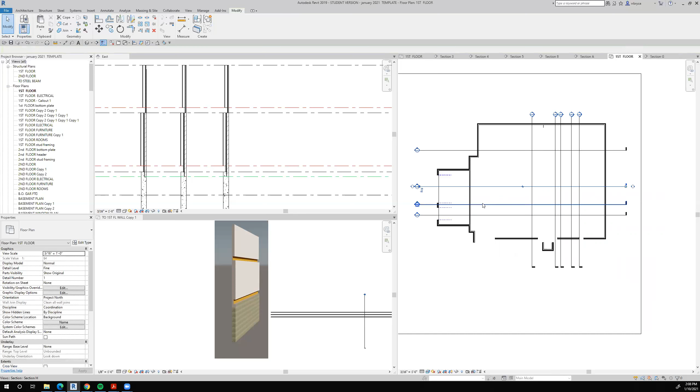So let's take a look at one of the sections through that stacked wall. Interesting. Okay, let's see what's going on here. Here we go. Here's what we're looking for right here. The stacked wall. Now, I'm assuming that there's going to be a second floor wall up here, and so I'm going to make my stacked wall accordingly. But if it turns out that there isn't a second floor right over at this point, then I wouldn't have a stacked wall that has a second floor wall on it. I'd simply make another wall that deletes that second floor wall.

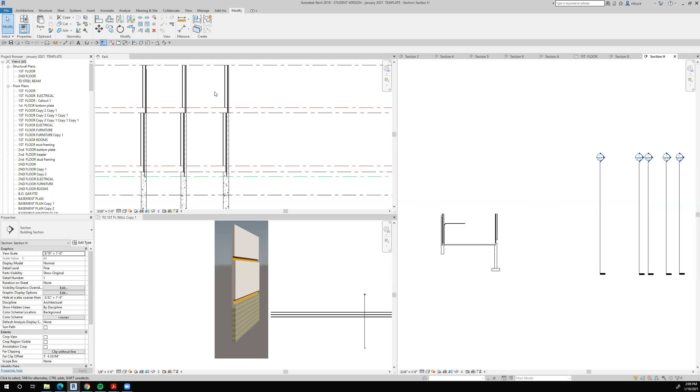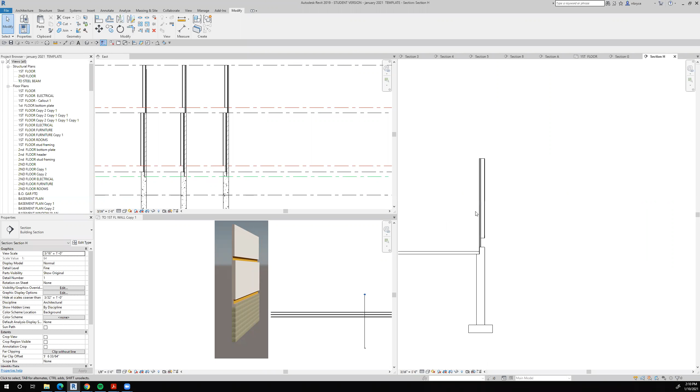So let's take a little closer look and see what the difference is here. Well, we still have our basement wall. We still have our brick ledge, but there's not any brick there. We still have our first floor band, but there's not any brick there. And we still have our first floor wall, but there's not any brick there. And I'll have a second floor wall, which also doesn't have brick. I'm going to modify this guy right here. I've copied this wall over. Maybe it'd be better if I copy this wall, because this is the wall that has those other pieces at the top. So I'll do that.

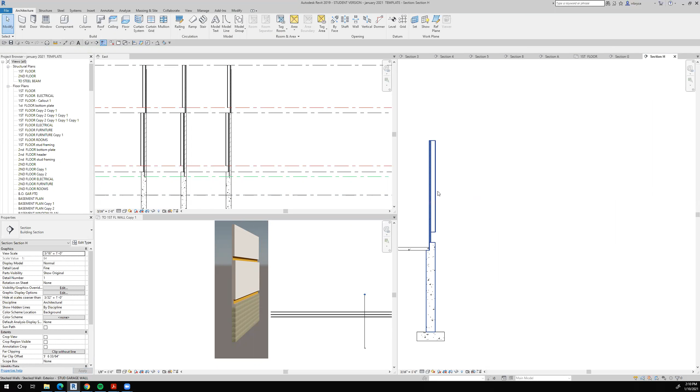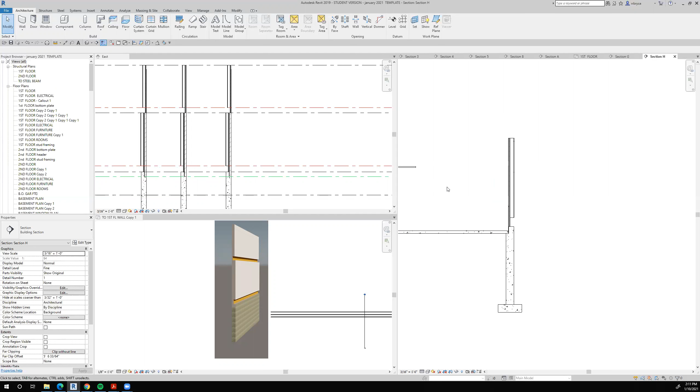And so now the only thing is that there won't be any brick, but there will be some gypsum board on the inside face of the garage. This is the garage wall. So the house is on this side, so we'll have a finished wall of gypsum board. And the garage is on this side, so we'll just have our gypsum board. That would definitely be a 5/8 Type X fire code gypsum board. If we have a fire in the garage, we want to retard the transmission of that fire from the garage to the house by putting a fire code type of gypsum board on that wall.

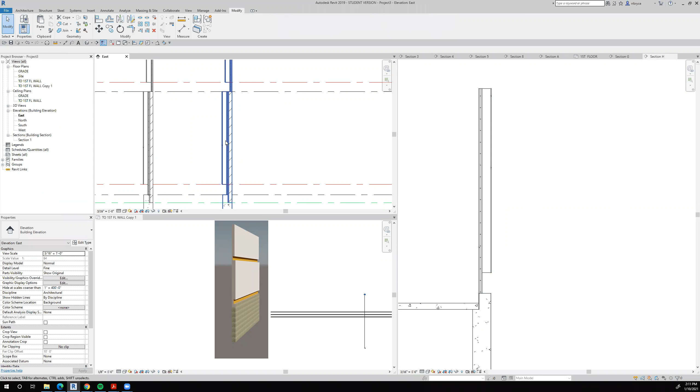So we're going to take this wall, this wall right here, which I don't remember what the number is, so we'll edit the type. And we just want to see what is the number of that wall. And when you click on these rows, it highlights in blue which one it is. So we're looking at wall number 4. So I'm going to say okay to that. I'm not changing it yet.

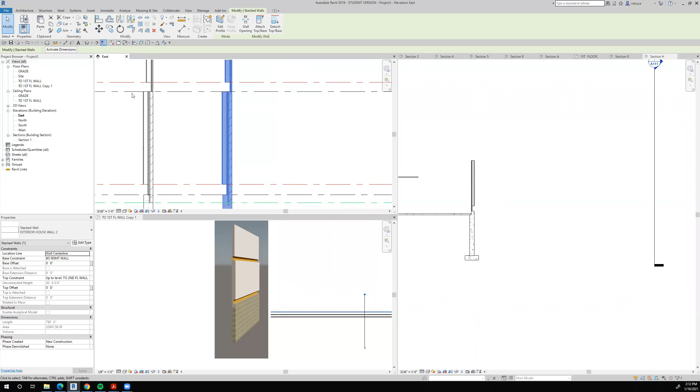Let's see. This is our active one. We'll go to our first floor wall. And I'm going to put in wall number 4, I think we said it was. So we'll go up to wall number 4 here. And we're going to edit that type, duplicate it, and then we'll call it 4-2. That's fine for now, okay? And then we'll just edit the type.

We're going to take the brick away, so we're going to delete that. And there's not going to be any airspace, but there will be some gypsum board. So we'll call that a finish. We'll change that to gypsum board, GYP. And we'll give that gypsum board a thickness of 5/8 of an inch; it has to be a minimum of 5/8 Type X fire code gypsum board. We'll say okay to that. Let's take a look. Now this wall looks good to me. It's going to have the gypsum board, the stud, plywood sheathing, the rigid insulation, and then the 5/8 gypsum board on the inside. So we call that 4-2.

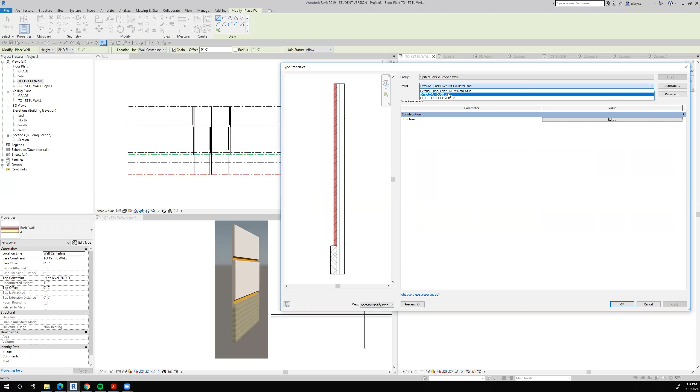Okay. And then we'll say okay to that. And then we're going to, let's go back and take a look at our stacked wall again. Or not that one, but either one of those is fine. We'll take a look at that just to see, we were looking at the bond now. What number is the bond? That's 3. So we'll say okay to that. I'll say okay to that.

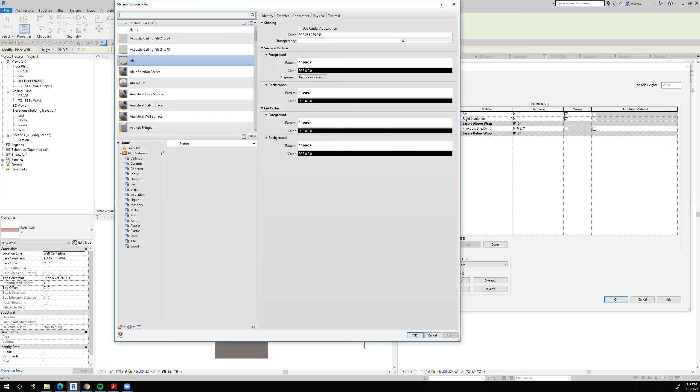Then we're going to edit wall 3. We'll duplicate it, and we'll call it 3-2, okay? And what we want to do is take away the brick. So we'll delete that. And we want to change the airspace to gypsum board. So we'll type GYP. And we'll change the thickness of that to 5/8 of an inch. And we'll change that to finish.

Okay. Let's look at it to make sure we have it right. Gypsum board. This is the bond, remember, so it's the gypsum board, the rigid insulation, and the plywood sheathing. That looks good. We'll say okay to that. And then let's go back and take a look at this wall again, what it's made up of. We'll edit the type. We've changed the bond. We've changed the wall, but we didn't change the brick ledge. So what number is that? That's number 7. So we'll say okay to that.

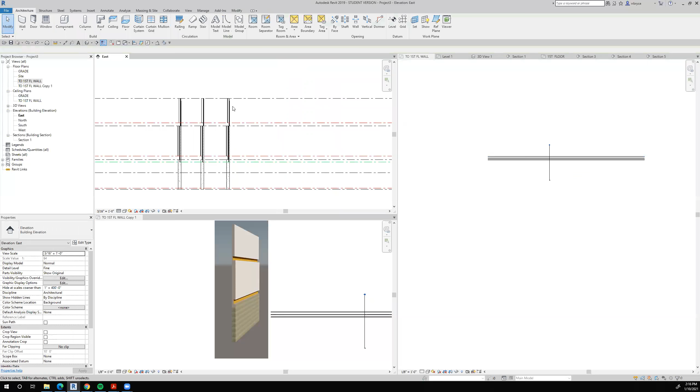And we'll go back. And we're going to change number 7 to 7-2. We'll duplicate it, and we'll just say 7-2 is fine for that. Okay, look at this. Oops, something's not right. So we're going to cancel that, go back. All right, undo. We're going to take a look at this wall again. I think I made a mistake here again. Let's come down to 7. 7 is definitely the brick ledge, so we're going to say okay to that. And we're going to say okay to that. I'm going to deactivate that because if I change it now, it'll change this to 7.

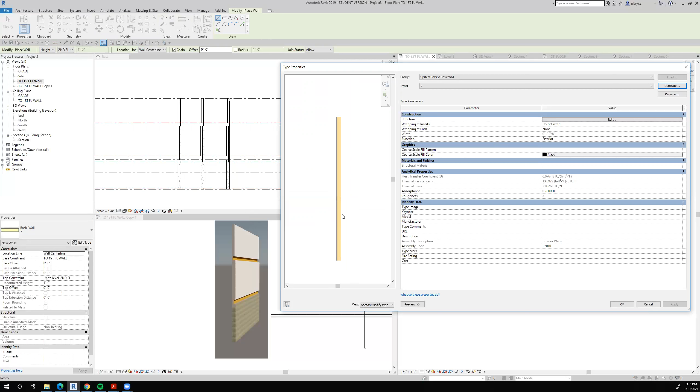So, all right, we're going to go architecture wall. We're going to take 7, duplicate it, edit the type, duplicate it. Now, see, here's where my question is. Cancel this out. There's no brick on this wall. This is not the wall that we want, although we're calling it 7. Cancel. Let's hit escape. We're going to go back another time and take a look at this guy.

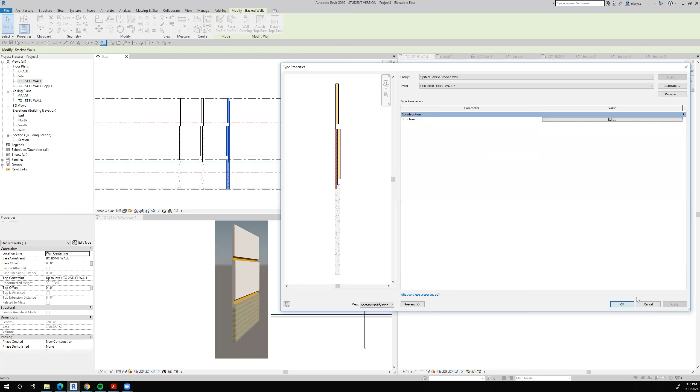Edit the type. Let's look at this. I'm looking at 7, it's definitely the brick ledge. 7, no, I'm on row 7. I want wall number 2. There was my mistake. I was looking at 7, but I really want wall number 2. Cancel. So the architecture wall number 2 is the one we want to duplicate. So we're going to edit the type, duplicate it. We'll call it 2-2, which is okay.

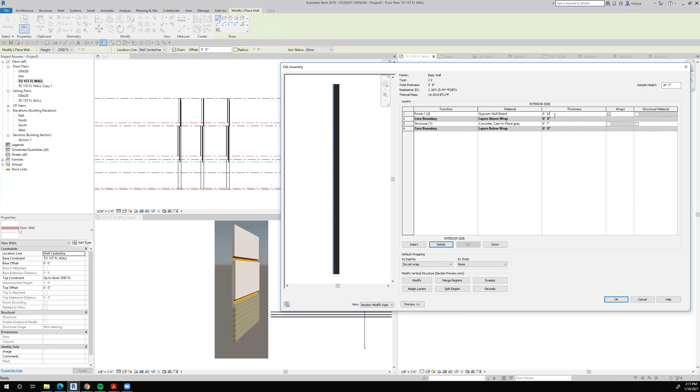And then we're going to edit this guy and take away the brick, delete the brick. We're going to change that to a finished material. We're going to make that our gypsum board. So we'll click a little button here and just type GYP. Make it gypsum and change the thickness of it to 5/8. Okay. And okay. Now I've copied this wall over to here.

I'm going to change this, edit the type, and I'm just going to rename it this time, and I'm going to call it exterior house wall garage. So it's my exterior house wall garage. So it's the wall between the house and the garage, and say okay to that.

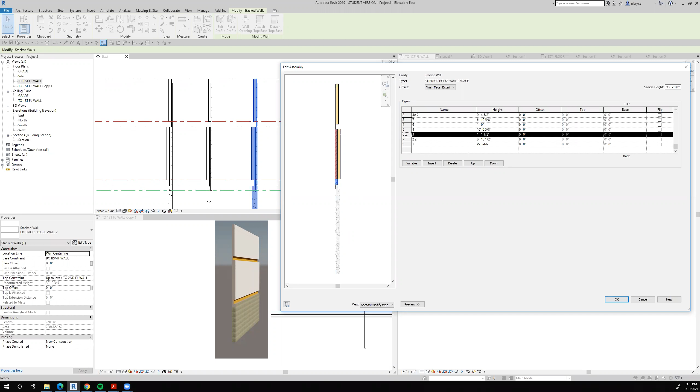All right. So this is a new wall, a new stacked wall, and the concrete's going to be okay. Row number 7, wall number 2 is going to be 2-2. Okay. And wall number 3 is going to be 3-2. We're making walls without brick. And then number 4 is going to be 4-2. Okay. Now let's look at it.

We have to move that back by 4 inches. So this guy's got to come back because the brick ledge is on the wrong side. So let's say -4 inches for that and see what happens. Not enough. We got to come back a little bit more because this should line up together. So let's say 4 5/8. Let's see if that'll do it. Nope, it's too much. We'll make it 4 1/2.

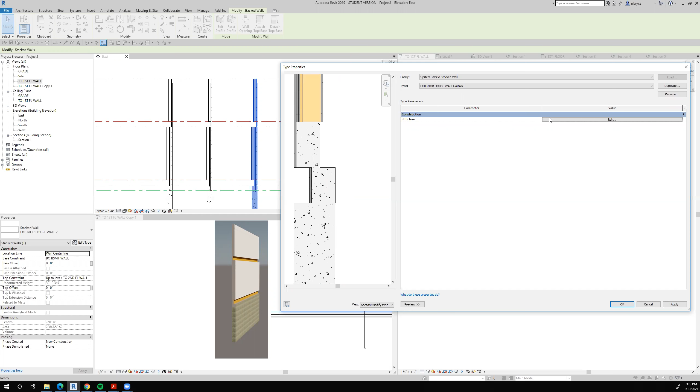So sometimes I get lazy and I'll just type 4 4/8 and see what happens. Oh, that didn't work. Yes, it did. Look, no, it's still off by a little bit, maybe 1/8 of an inch. So instead of 4/8, I'll make it 3/8. -3/8, not +3/8. What happened here? Let's see.

I want to make that 3/8 instead of 1/2. The height is fine. We'll make that -3/8 and see what happens. So we'll go back to -4 inches again, and we'll make it -4 1/8 and see what happens.

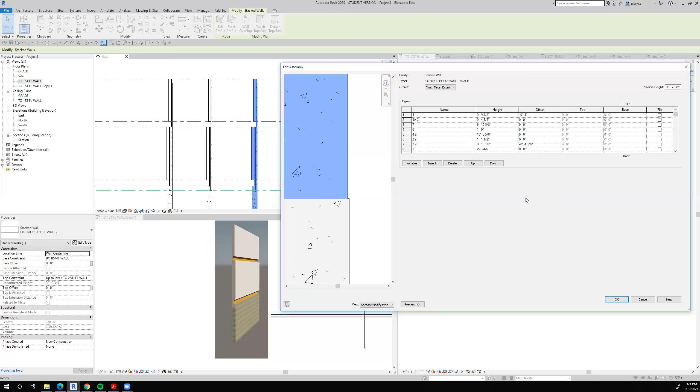That's what's happening there. So I'm going to change this guy right here to -4 1/8 of an inch, and let's see if it lines up. It still doesn't. So let's make it 4 2/8. Let's see if that does it. Nope. Let's make it -4 3/8. See what happens. Yep, now it lines up perfectly.

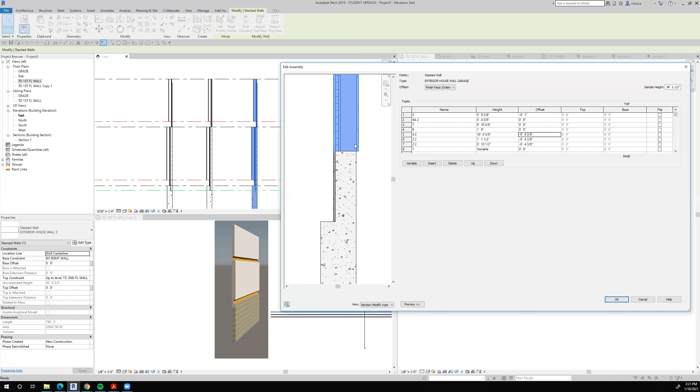Okay, so let's go up to this guy and do the same thing. I'm going to copy that, Control-C, and paste it in here, Control-V, and let's see what happens. Yep, that's good. Let's see what happens if we do the same thing up here. Control-V, and my gypsum board is lining up, so that's great.

Okay, now what's going on up here is the next question. We have, let's see what happens if we Control-V on that. Yeah, we want to make sure that the, no, that's not right. Something's definitely wrong here. I don't think I made the thickness of my gypsum board here correct for this wall, which is 4-2.

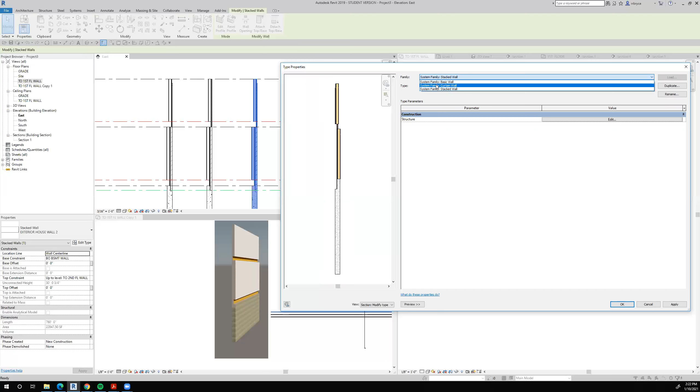So we'll say okay to that for now, and let's go back and take a look at wall 4-2. And my finish is 5/8, so that's good. Okay, so, oh, that's siding.

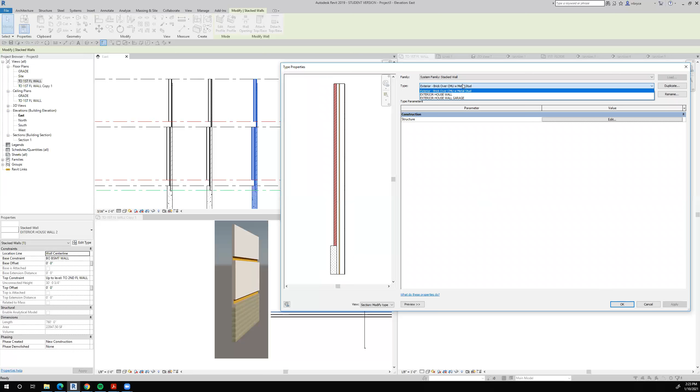All right, so we'll go back to our stacked wall. We want to see the stacked wall between the house and the garage. And this doesn't line up because now that 4-2 is siding, and we'll leave it at siding for now because we don't know how that's going to play out.

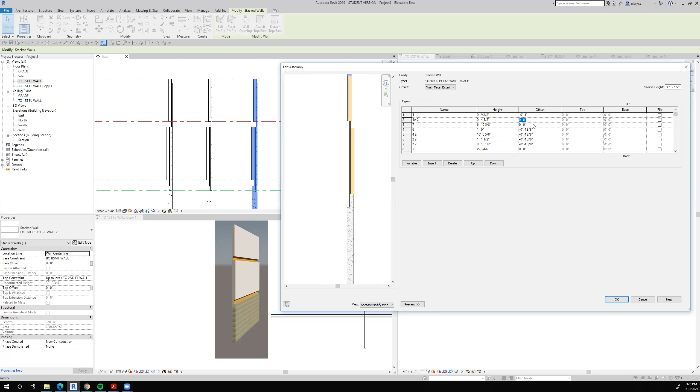All right, so we'll edit this type here and do the same thing. Control-C and Control-V. Let's see what happens. So the siding should line up now. It does. Okay, and then we'll do the same thing for these two guys as well.

Just see what happens. Control-V. And yeah, that's lining up for now. So that's all right. And then we'll do the last one, which is this guy. Control-V. Might not work. Let's see what happens. Yeah, we got to go back another inch. So -4, we'll go back 5. Just to line this up, make sure that everything lines up. So the, yeah, it does for now.

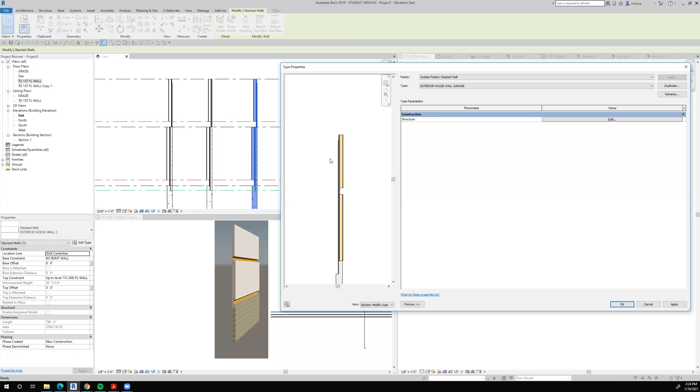Now, the reason I'm not too concerned about that right now is I don't actually know how the roof is going to connect with the second floor wall. If there isn't any space over the garage as far as second floor house, then I'll have a roof over the garage, and I don't actually know how that's going to relate to this wall. So for now, I'm still assuming that this is an exterior wall. Part of that wall may end up being underneath the roof. So anyway, we'll leave it like that. That looks good for me in terms of this wall.

So now let's take a look at it a little closer. All right, that looks good. The bond area lines up, so that looks good. Bond area, something weird here. We got to change this. This has got to be back to the bond again, so we didn't change that yet. So let's edit it and take a look at this guy here.

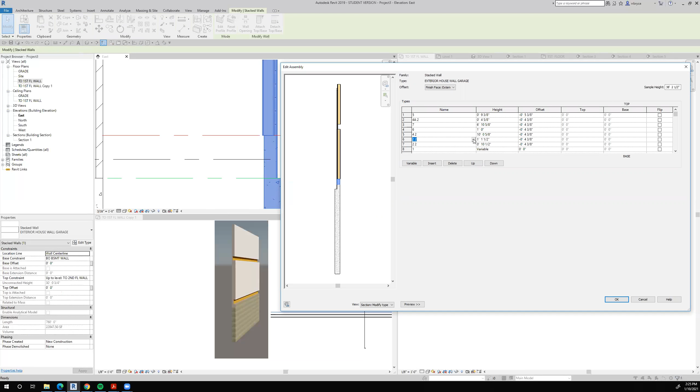And 7 is not what we want, but we made 6-2-2, and it really should be 3-2. Let's see what happens if we make it 3-2. There we go. We got our bond back in there now, and the gypsum board lines up. So everything looks good. We'll say okay to that. And now that wall looks good too.

Because what we tried to do with this wall, which is the wall between the house and the garage, we don't want any brick on it. We want gypsum board. So that looks good to me. So I'm going to save this.